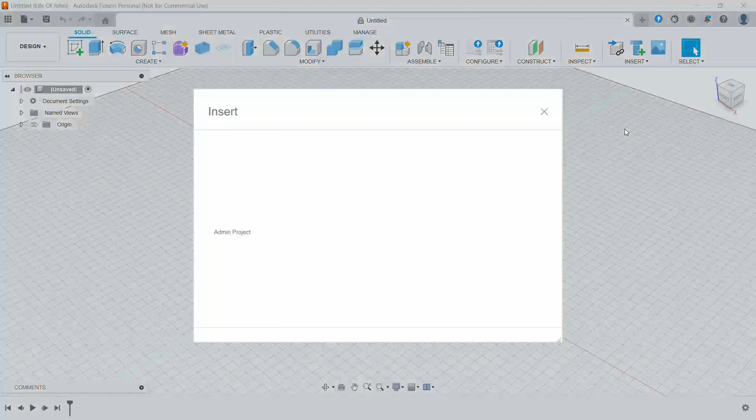If I can keep up - so, insert SVG, scroll to the flag I want. If there's a suitable one, not that one, start again. Have another little look, that one, not that one. Insert SVG, I think it's number 4, was it? Number 4, move it about. That looks suitable to me.

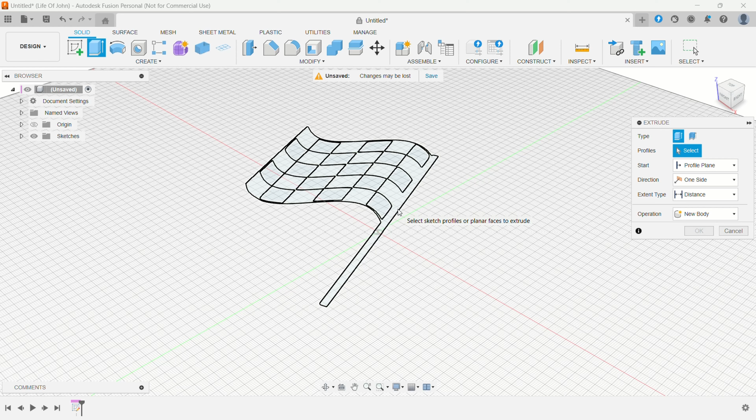So number 4, drag it into place on the center of the XY0, click OK. Now, when I zoomed in, I noticed there were some gaps on this file. So click on the file first of all, extrude it, and create a flag. There you go, simple, but there's little gaps.

Look, see there are gaps there. I didn't realize there was gaps when I bought this file, but we can work with that. What I'm going to do, I'm going to mirror image this one in a minute, but that's why I put it on the center line of the X and Y.

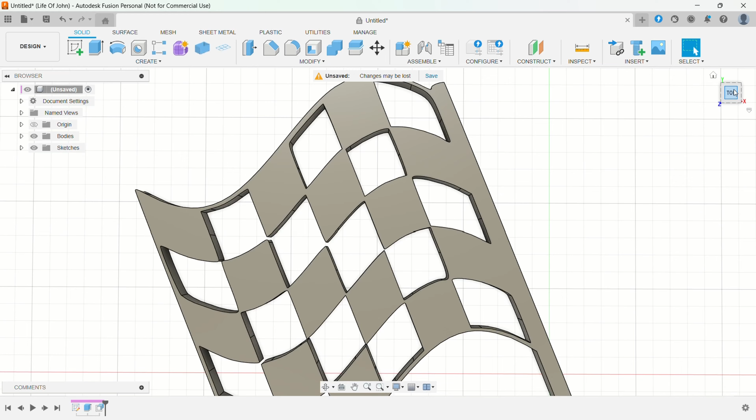So I'm just using push-pull functions here to just close up these gaps. Some methods worked, some methods didn't, so it was basically a bit of trial and error.

Left click your mouse, drag it around on the screen. If you look on the bottom right hand corner, you'll see that sometimes it didn't always work, depending on how many faces I chose, depending on what operation I did. I think I used push-pull, sometimes I added a larger radius.

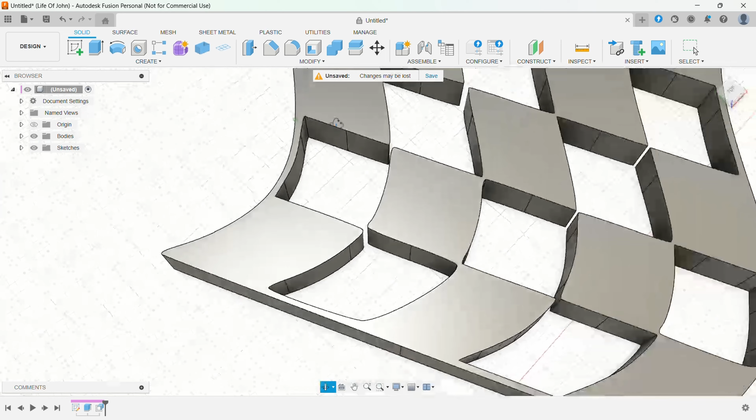Various methods, and I'm just trying to close up these gaps. I didn't want these little gaps there where the flag doesn't meet. So there you go, look, is it a bit too much or not? That looks all right, so I'm just sort of fiddling around.

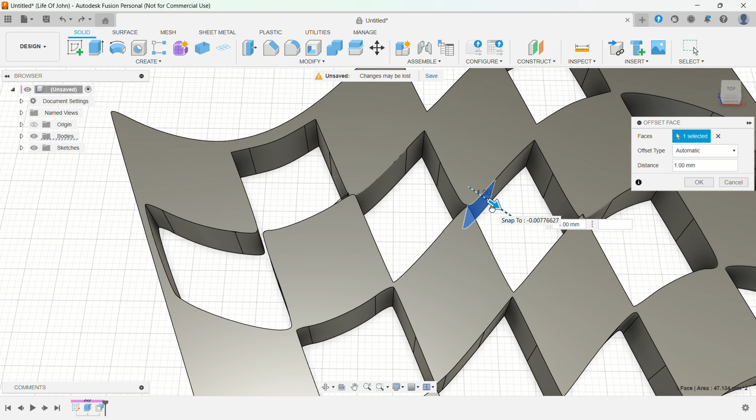Once it's complete, I mean, I don't like these radiuses, if you look, there's some rads there. So I'm going backwards, undo, forward, undo, doing that there, pulling that there. It's a bit of trial and error, really.

I just want to close up all the gaps. This funny one here, some of these weird ones I couldn't do. Pull that out there using a push-pull. Little rad in the corner there, tie that up.

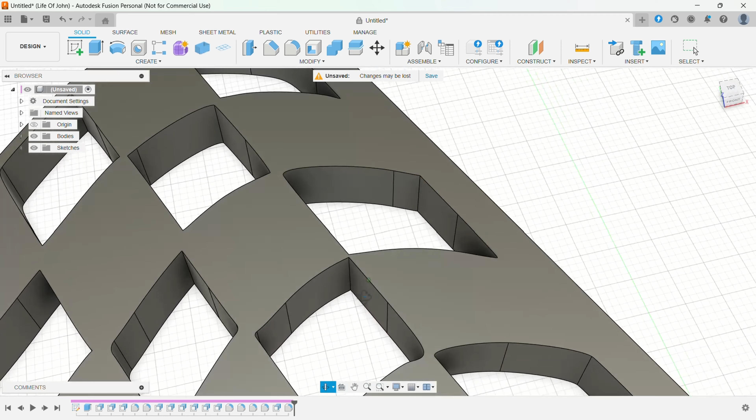I'm just checking for thin areas. That's it, the little radius there, 0.5. Another 0.5, rad in the corner there. There's one area I couldn't do.

I had to actually do a drawing, had to go into sketch mode, if I remember rightly, and that piece there wouldn't sort of tidy up. So, this is working fine. Is this piece here?

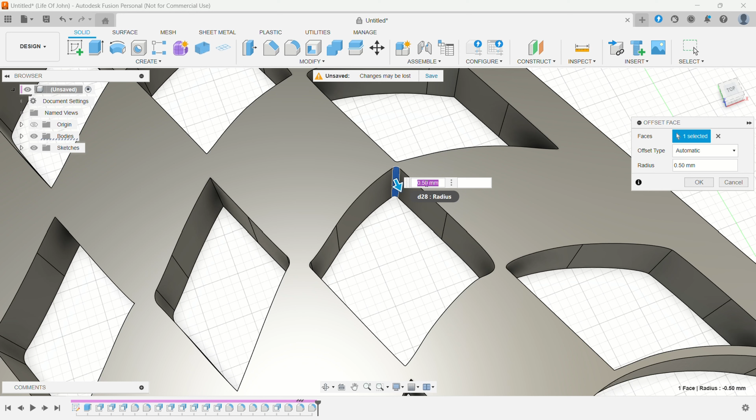So what I'm doing now, create a new sketch on the Z, place a little drawing, draw a little circle. That's it. Nope. Okay.

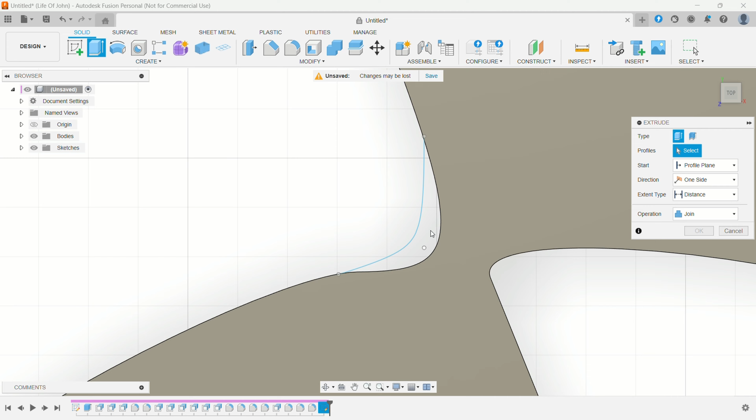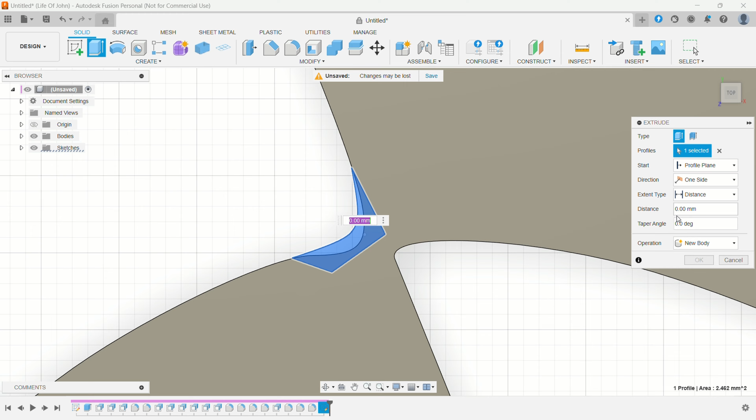I end up drawing using a polygon line, I think, in the end. Line to point, and then another line there, just to join it up. Now I create a solid there, and extrude that to, I think, 8mm high. There you go, done.

When I'm totally happy with this, I'm going to go into mirror. So I mirror this, and it's on the center line.

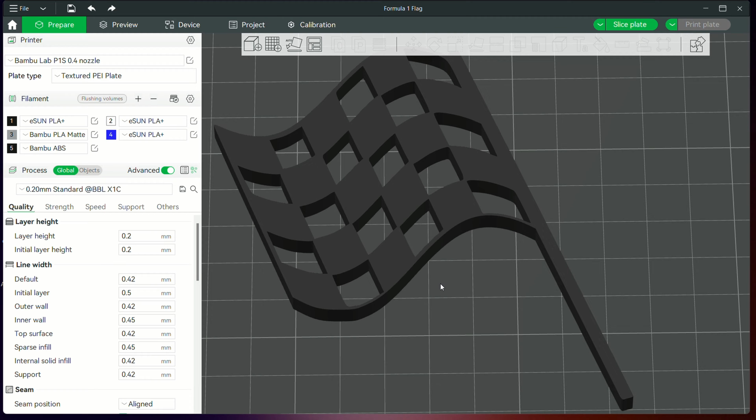So I save it. What I did was a small test print first, just to see how it comes out. And if I remember rightly, it came out a bit small, a bit thin.

I saved it as a 3D print. You can actually sort of scale it in the Bambu Lab Studio software. Just checking for thin areas there. It seemed to come out all right.

So I printed that. I did a little flag, saved it, exported it. I got these files from, as you'll see if you watched the clips earlier, the SVG files. I could have drawn them up myself, but I bought them from Etsy, and I'll put a link below. You can search the internet if you want and buy the flag, or get a free flag from somewhere and convert it to SVG.

I happened to download, buy for I think it's 90 pence, 95 pence, a handful of flag files. Imported various ones into Fusion, found the one I wanted. It still needed some work on it. If you watch the previous clips, you'll see me push, pull, and put some rads on and tighten it up a little bit.

What I did then is I printed out a little small flag. The next stage, I'm going to mirror it and add the names to it and do it again. But anyway, that's the flag so far - if you look at it, it's a tiny mini little flag like that, no good to man nor beast.

The next thing is I scaled it down in the Bambu Lab printer studio app, basically to size. So I've got a bit of this mini flag there, like 100mm, whatever. Have a little look - that's the underside, which comes out quite nice. But have a little look, got a bit of a blob there.

It went wrong. One minute it printed happily, merrily printing away, next minute it didn't stick - it lifted off the plate.

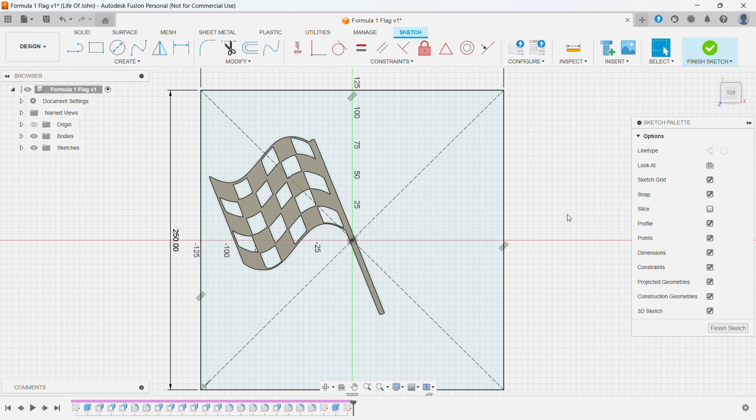So I've done a test print, and I was quite happy with that. So now I'm back into Fusion, scaling it up a little bit. Now I'm going to do a mirror image. So I select the object, and then I'll extrude it first.

Let me have a little look - 10mm, yeah, make it a little bit bigger. New body.

I made a bit of a mistake there. Let's have a little look how high it is. 8mm high.

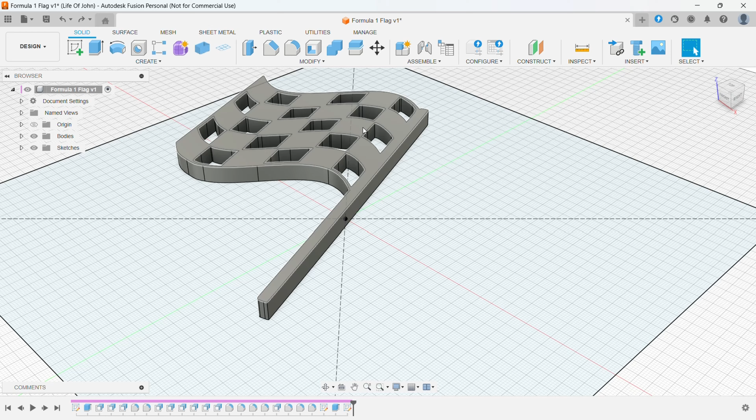Trying to select it, I'm selecting the wrong object. So select that. Join. I think I'll make it 10mm, add another 2mm to it. There you go, so it's 10mm in height overall.

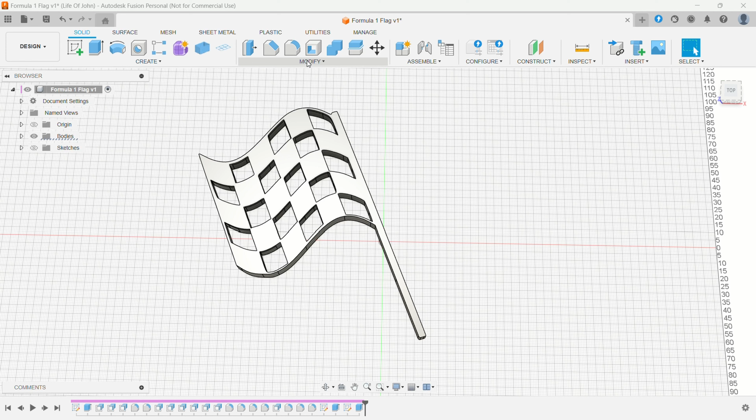Now I'm happy with that. Just turn the sketches off, get them out of the way. Now I'm going to create a mirror image of that. Select it, then go over to the right hand side there, select the mirror line there. Click OK, so I've got my 2 flags.

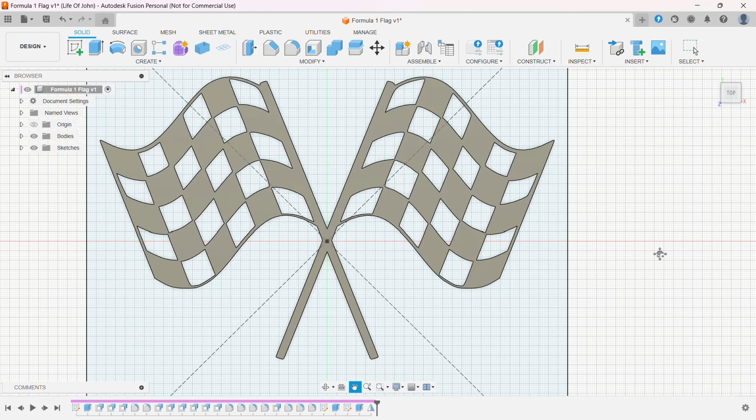Happy with that. Now at this point here, I think I add some text. Turn the sketches back on. Save it.

I drew a square actually, 250 by 250 I think it was, which is pretty much the bed size, the size of the machine, so I knew roughly what size it's going to turn out.

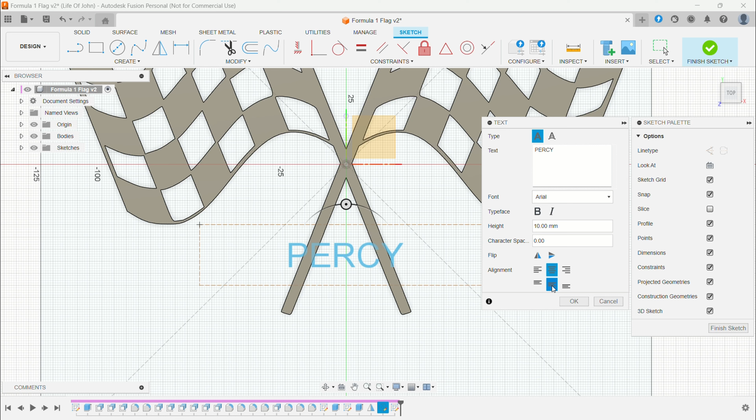Now I'm going to add some text. I can import SVG from another program, some text. Quite often I write my text in a graphic software and import that. So it was an SVG, import as an SVG, but I didn't want any fancy text here, so this text was fine, the extra text that comes with Fusion was fine.

Sort out my size, my height. I'm sort of looking for something, it needs to be joined together, but I think I'll do a line, I'll underline it in the end. So I'm just squaring it up, lining it. I'm counting little squares actually, but I can see it's centered. There you go.

Just move it left out a bit, modify, move. I just want to get it in a nice position, somewhere I'm happy with.

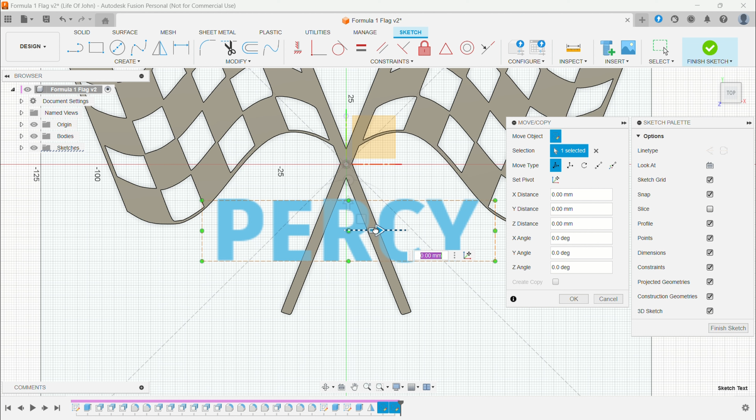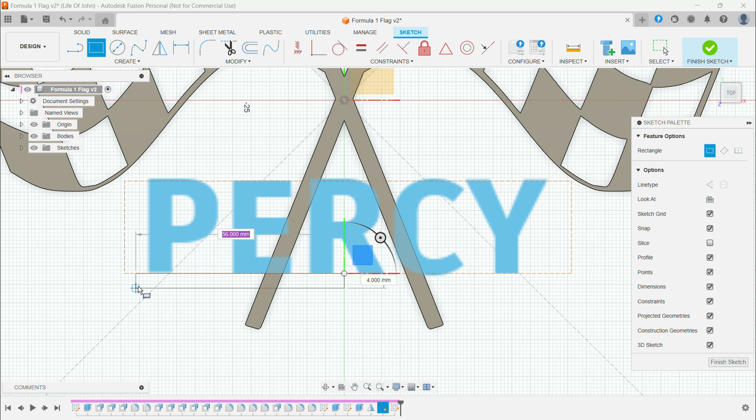Right, now I'm doing a little rectangle underneath I think, just to join it all together. So draw a rectangle. That's a bit like the underline, it will help keep the letters together, because obviously you can't have floating letters. Select that, mirror it. There you go, I've got two now.

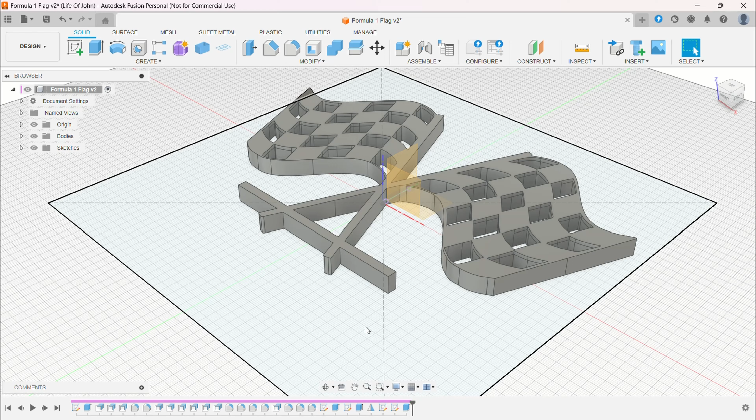Now I'm going to join that all up, extrude that. There's the underline now. Where's my text gone?

Right, let's pop back now and extrude the text. I think I did the text a little bit higher, I can't remember now, we'll see. Quite often it's easy to do the text higher, and then you can print it 10mm for instance, all black, and then you can print that. Let me see, I can't remember what I did.

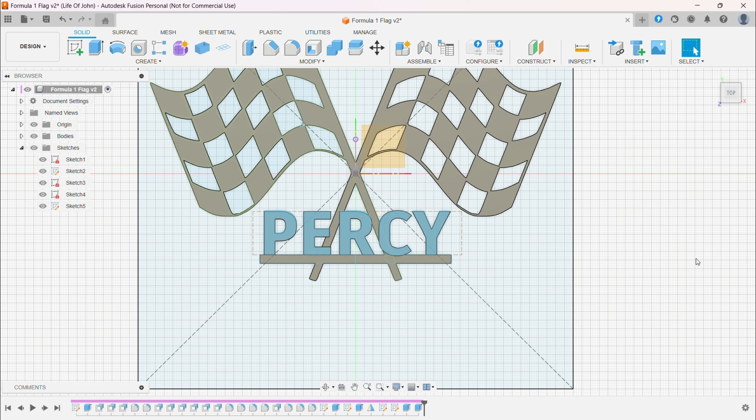12mm, yeah, so I'm going to colour that in 2mm. The whole thing's going to be black, and the 2mm top is going to be red. It prints a lot easier that way. Done, job's good, and look at that. Turn off the sketches.

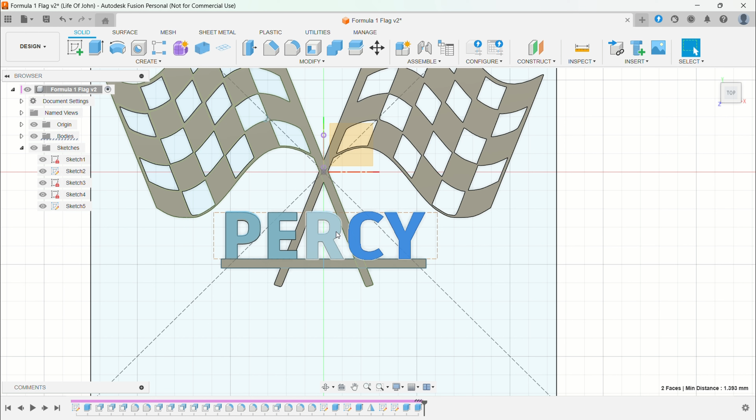A bit fussy, I'm just trying to move it all about, and it wouldn't move, I don't think. Right, I'm happy with that now. Look at that.

Right, what I normally do by default, I left click, select the whole lot, combine. I think you'll see me do that in a minute.

Looking good, this is fine. Now I've drawn it up myself, I can actually sell this myself, do what I want with it.

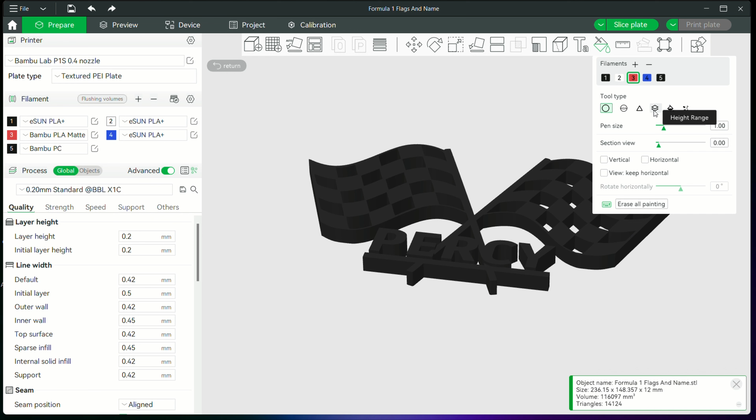There you go, straight into Bambu Lab. You can also scale it into Bambu Studio software. It's all black, but I'm just going to choose the red fill, 2mm. I'm just going to tuck that letter in, it's just be 2mm. There you go.

So the whole flag is black, 2mm writing. I'm happy with that. Slice plate and print.

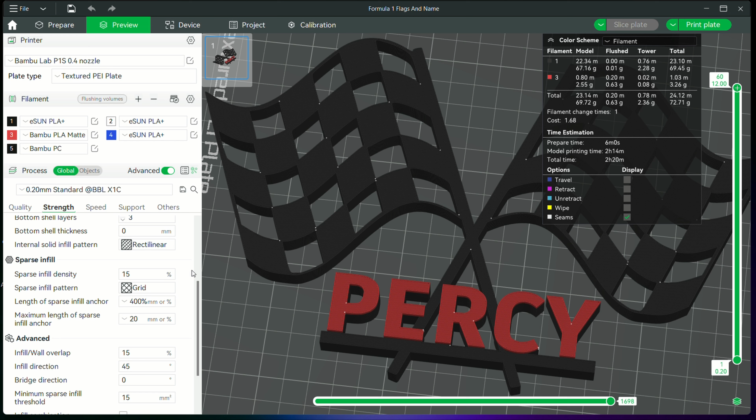Just going to alter the strength of it, check some settings here, layer height and stuff like that. Seam position at the back, so I want it hidden. I want that seam hidden at the back.

Slicing and printing for the AMS Bambu Lab printer with an AMS system.

There we go, have a little peek. Look, looking good. That's my own file now, so I can actually sell that if I wanted to on Etsy. It's better to draw your own stuff up than nick other people's stuff.

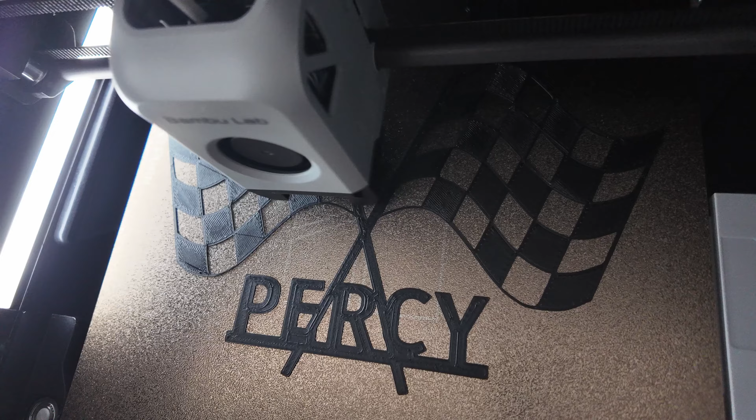I'm still plodding my way through the Formula 1 stuff for my relation. Done some coasters there, and next step I'll do later on today, I'll do a little holder to hold these. They need a little backing piece on there, but I'll let them do that, a little bit of foam or cork. Next job, I think I did a video before, I'll link to it above and below.

Next job is to print one of these. These look like a Formula 1 map for 2025, showing all the tracks and the countries where they exist. I'm going to print that out.

I've used glue on this one. I recommend this glue because it's quite a large plate, and it fills the plate up. You tend to find with these flat prints, they tend to curl up in the corners, so the old Bambu lab glue does work a treat. Spread a layer of that on, and then press print, which is what I'm going to do now.

Just to add, for this one I'm doing a time lapse, so I'll show you a little time lapse of this printing.

I also do bed leveling, but not on a regular basis - it depends on the job. Small parts in the middle of the bed, it doesn't matter too much. But if I'm doing something large and flat that takes up the whole plate, I tend to click the bed leveling option, and that will calibrate it and level it all out nice and neat.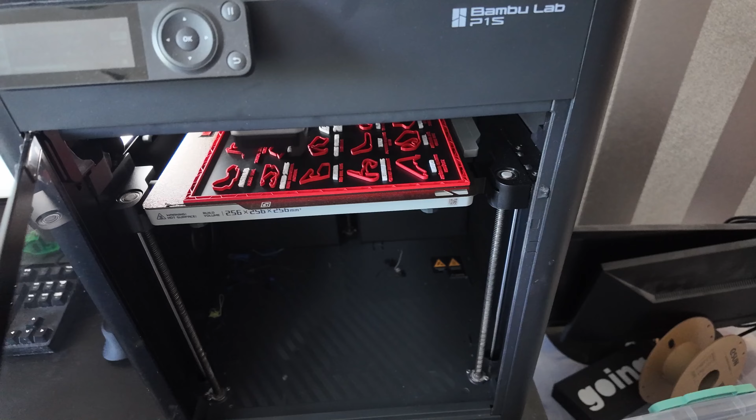This is another file I've done before - the Formula 1 tracks for 2025. This is available to download. It's not my file, so I'm not selling this, I'm giving this away to someone. I'm printing this for family members, so I'm okay to print this, but you can't sell it, I don't think, unless you speak to them and get a license off of them.

But they come out really nice. That sound is the printer finishing - that's a 4-hour print, and I think it's come out really, really well. I'm really pleased, and I think this little young lad will love this. Let's have a little look.

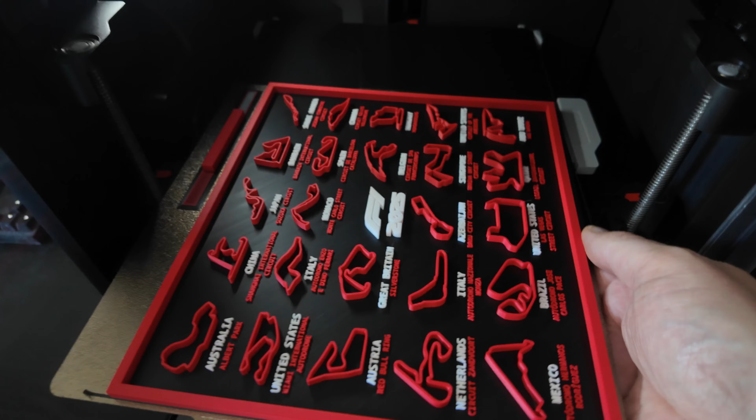Look at this one. All the circuits 3D printed - that's come out absolutely gorgeous. I love it, better than the one I did before. This is like a gift for my little mate.

But let's take this off now and have a little look. So you break off the waste. As I said earlier, I use glue on this because when you get a larger print like that, it's best to use some glue. I use the Bambu Lab stuff, a thin coating over the whole plate, and it helps the whole thing adhere - otherwise it starts peeling up at the edges. But obviously it's hard to get off.

Look at that. Let's take the little tag off there. There you go. You can see the glue on the back, a little bit of glue, but I'm well pleased with that. You see that focused in there. Look at that - brilliant, I love it.

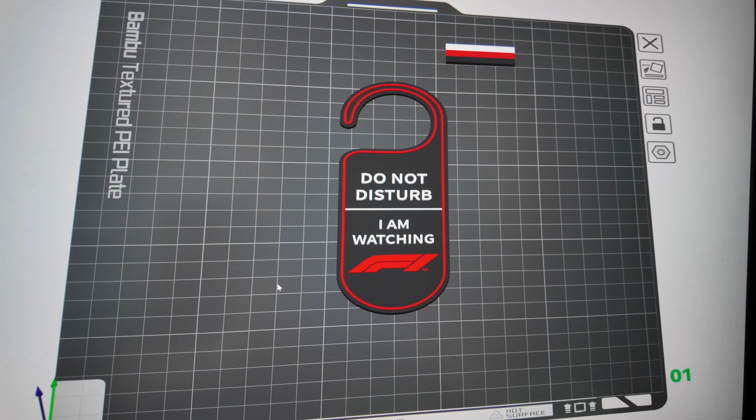I'm going to do one last thing to print. I think I'll do this one - the do not disturb, I'm watching sign. Oh, it's doing it up that way, is it? Okay, that's good. Slice plate - I've got the colours in already, so I should recognise all the colours. One, 4 and 2. That's correct.

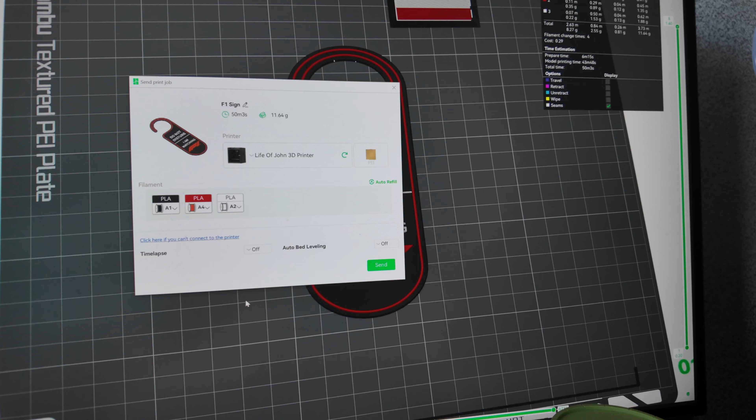I'll put the time lapse on for that one. That is it, that's the final piece now. I'm going to wrap this video up now and call it a day.